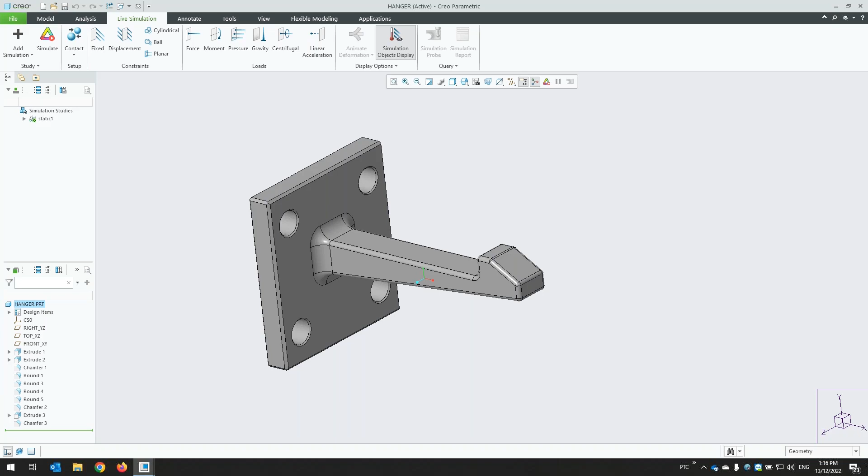Look, this is a really simple model, but I think it's good enough to explain what Creo Simulation Live is. So if we're familiar with Creo, there is a tab there called Live Simulation, and this is directly embedded into Creo. I'm going to do a really simple analysis on this model. This model hasn't been set up, no tricks here. So I'm going to set it up from scratch, and you see how quick and easy that can be.

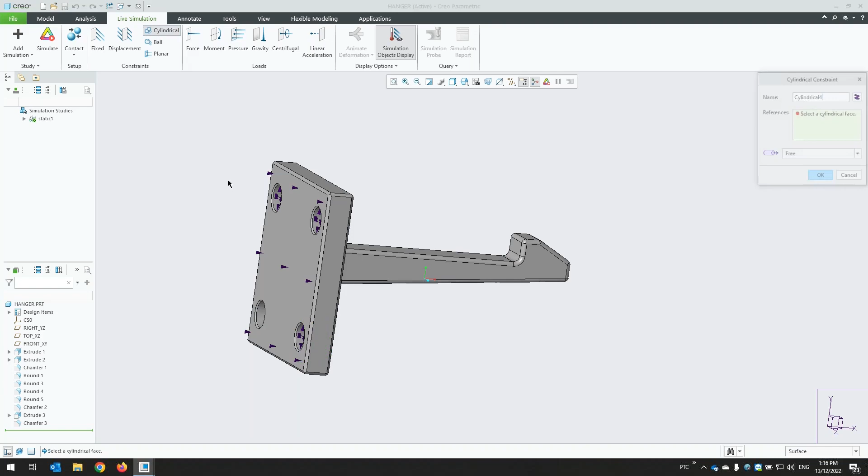So we'll create a planar constraint here, and we'll create cylindrical to represent all of the bolts that might be there. Okay, and you can see I just got to click a few times there. That's basically the constraint setup. The material's got material properties which have been assigned in Creo. So I'll put a force on here, say 50 newtons in the Y direction. As soon as I've done that, I solve.

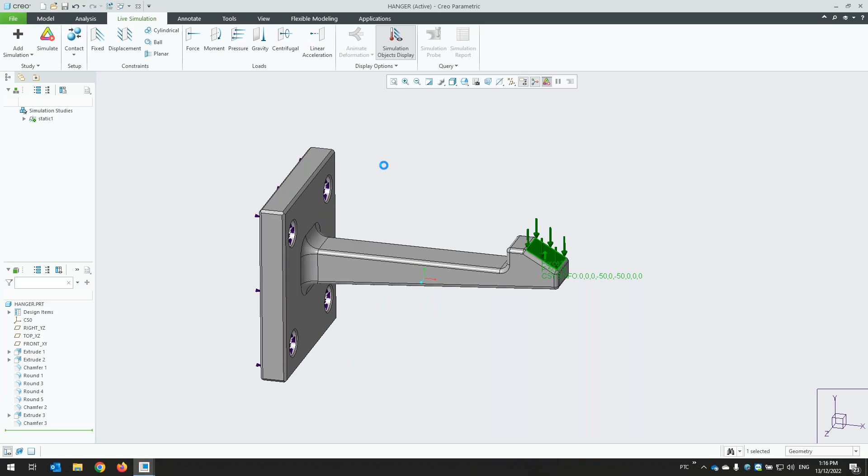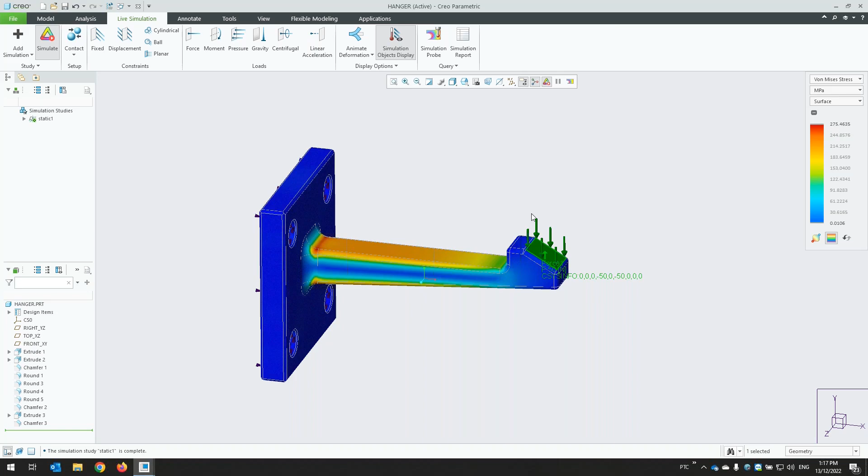You can see what's happening is it develops the solution over time. It iterates towards the solution, but it gets there fairly quickly. It is a different technology than the traditional analysis, as Alan mentioned, but you can see how quickly we get a result there. So we're looking here now at the maximum von Mises stress. Perhaps that's a little bit too high. So for our design, what can we change? Maybe we can change the width of this to 3.5 instead of 3.

Now, you notice I've had the simulation visible there and running, but then I've gone away and made a change. So the system automatically starts to recalculate. We had 270 before, now we've got 240. If that's still not enough, we can change again. So now it needs to be 4.5 or something. And it's really great for giving us that understanding about what's happening with the model.

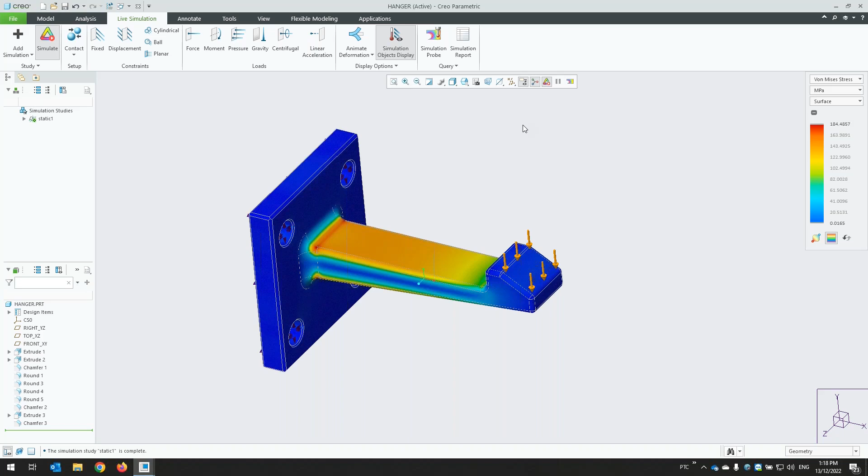If you think about this model, the way it's loaded and constrained, intuitively, if that gets wider, the stress should go down. But in other scenarios, we might not know. The intention is that it's meant to be a design level tool, for anyone and everyone. And sometimes we might not understand what influence a change might have. So you can see here we've done that change.

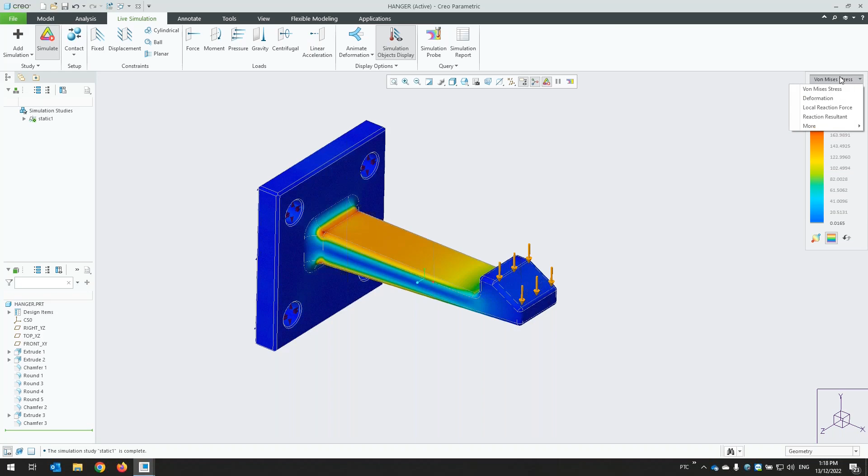So we're looking here at the stress, but we can also look at many other things. So deformation: how far does that deform? There's the ability for us to animate that, and this is exaggerated, of course, but you can see we get a potential deformed shape that shows the culmination and summation of all of our loads coming in. And although I've kept this quite simple, I've just done a couple of constraints, there are a whole bunch of other types of loads that we can apply. You can see here as well some other options.

Now this is, as Alan said, based purely on the GPU. If we go here as well, we have a fidelity setting, which allows us to control how accurate these results are. At the moment, this is set to optimal speed versus accuracy for the demo, and this is the default setting. But if we want to go to higher accuracy, we can. It just means the time it takes to solve increases. So I won't do that for today.

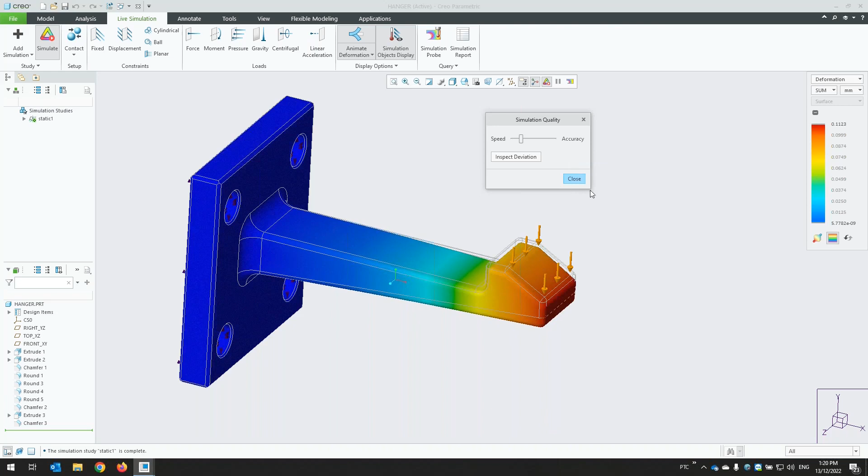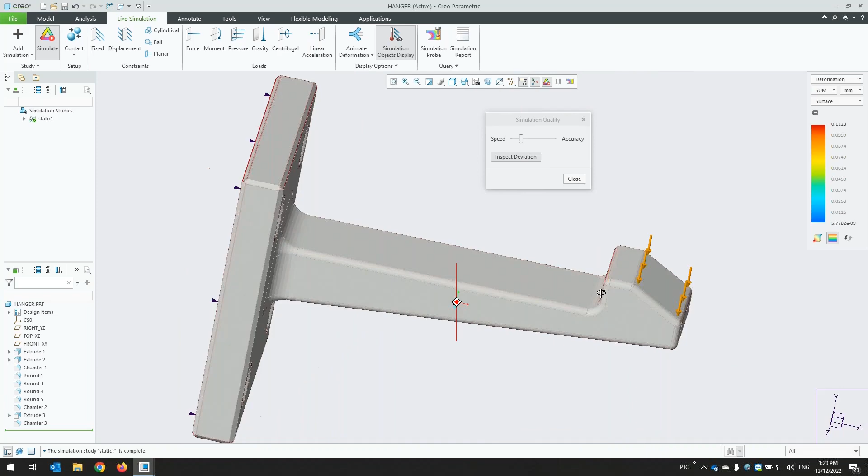The other thing we can look at, in some models it can become a bit of an issue, and this is getting into the more technical side of things, is how accurately our model is analyzed, and we can actually have a look at that. Any areas that are really red would be a problem. But just based on my experience, this model is working quite well. All right, that's pretty much it for the structural side.

Alan, I'm not sure what your plan was, if we want me to do the fluids now? Yeah, sure, go. Yeah, now it's fine. I think we've got time, so that's all good. I just didn't know if you had anything else to say before that. No, that's okay, all good.

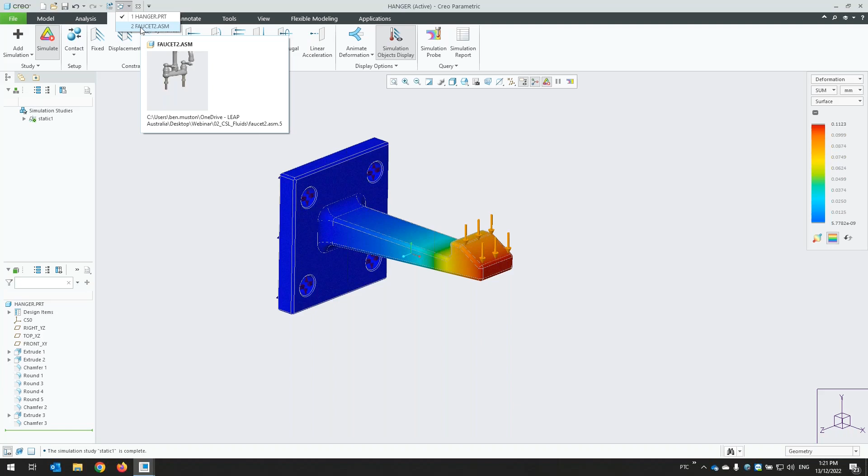All right, so moving on to another relatively simple example. We've got a tap set here, faucet, whatever you want to call it. Again, we've got the live simulation tab, but here we're working in the fluid mode. Alan pointed this out before, but we can add simulations of different types to the same model. So we've got a structural analysis, and we can have a fluid analysis as well.

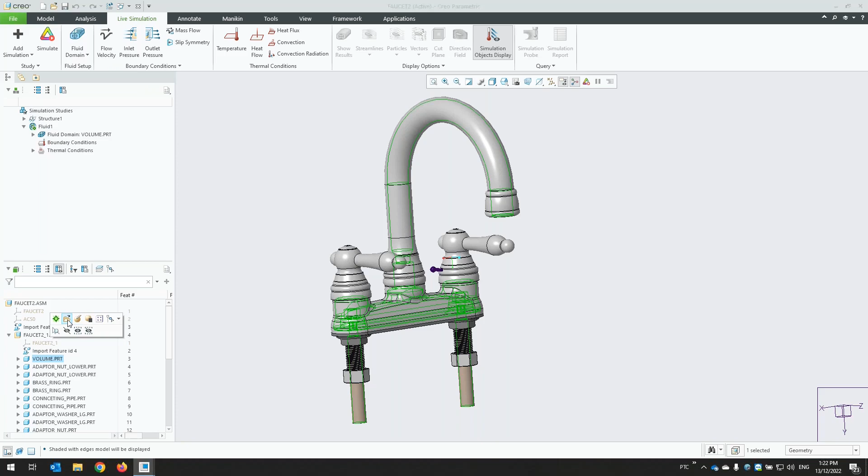When we're doing a fluid analysis, what we do need is a volume that represents where the fluid is going to flow. In this case, it's been set up, but there are tools here that help us quickly and easily define that. I'll just show you what's been set up. There is a volume part here. If I open that up, this is the internal volume of what we're analyzing, where the water would be able to flow.

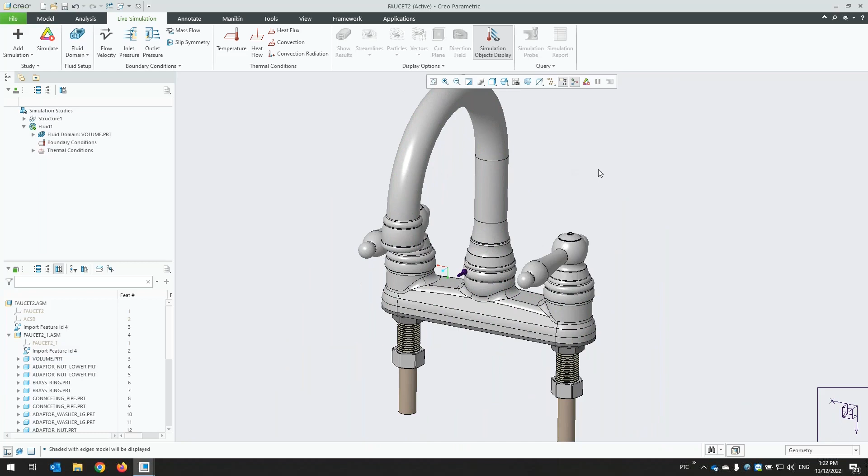Okay. Now, if we come back to here, if I was to select that part, you can see that it is sitting inside the overall solid geometry. So to set this up, again, it's pretty simple. In this case, a good option is to set a mass flow, so we know how much water is flowing through

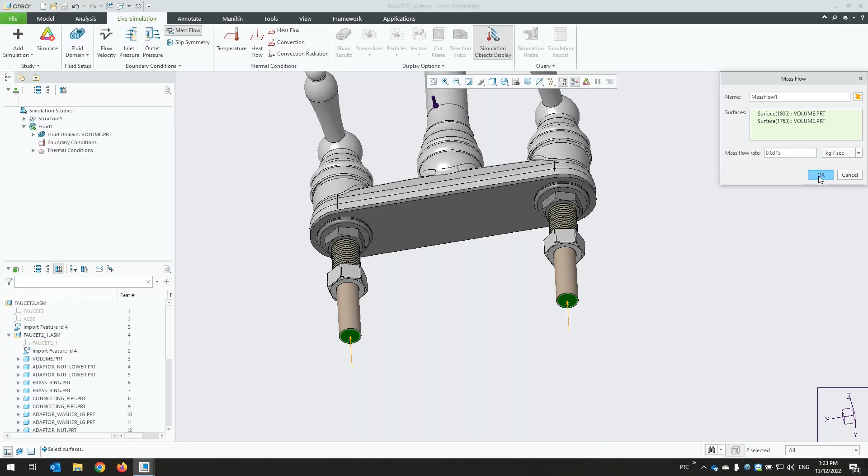through here. Now, in this case, we're assuming that we're turning both taps on to full, or to the same amount at least, at this particular rate, which we obviously would need to know and determine. If we're turning one on faster than the other, then of course we can adjust those values, but for now we're just assuming it's the same.

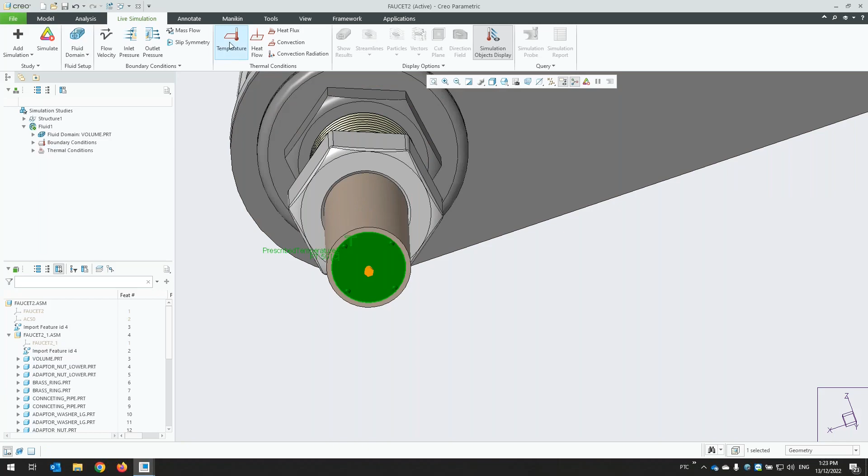Now, of course, one of them is going to be hot and one of them is going to be cold. So we can put a temperature condition on as well. So we can say a temperature of, let's say, 50 Celsius. And we can also put another temperature on here. Let's say it's winter, maybe it's 5 Celsius, okay?

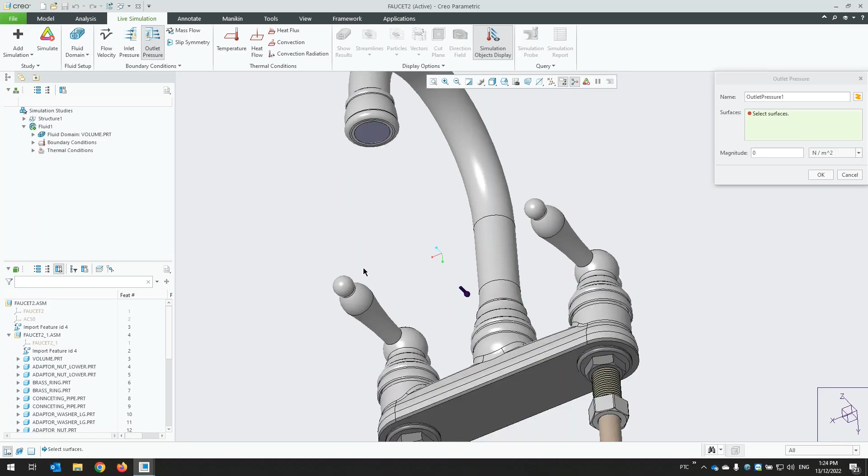So now that that's done, the only thing we really need to do is set an outlet condition, and that involves simply selecting this surface here and saying there's a pressure. Typically in CFD and this type of analysis, you set a 0 outlet pressure, so I don't even need to type a value in there. All right, that's all I need to do to set it up. Now what I need to do is just run it.

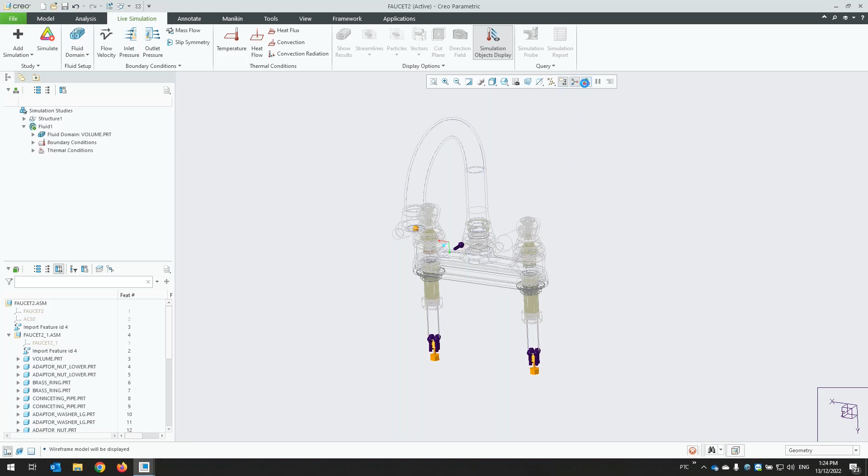And so you can see in the graphics toolbar here, and this was there before in the previous analysis, there's a little button, and you can see that at the moment this is showing velocity, but let's quickly change it to temperature. And you can see on the left we've got hot, on the right we've got cold, and how that flow is, as the solve is going, how it's working.

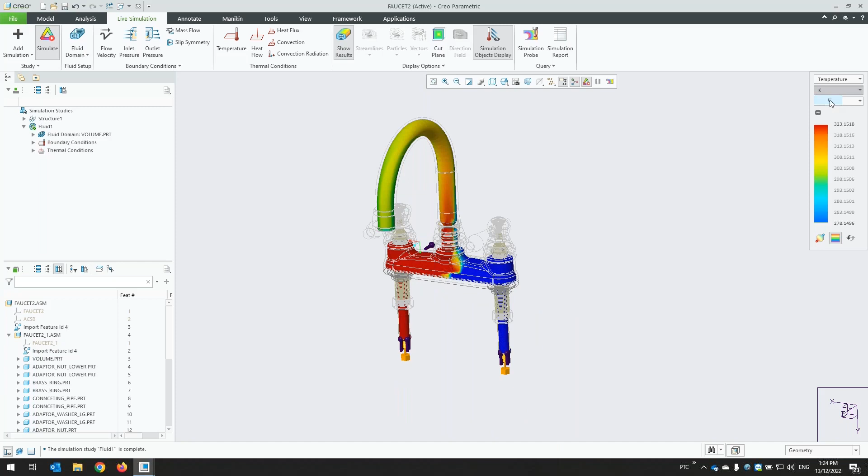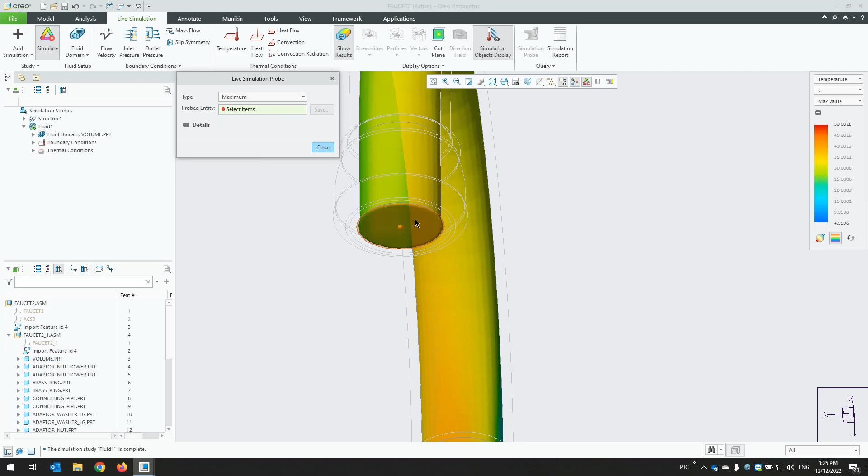Now, CFD is not necessarily as simple as a steady state solution because things are obviously flowing, but you can see there that we get, and if we change that to Celsius, you can see the maximum is 50.0018. That's potentially an accuracy setting that we talked about before, but it's a very minor differential. We can also do a simulation probe, so we can measure what's happening at a point here, or we could say what's the maximum for that surface, okay?

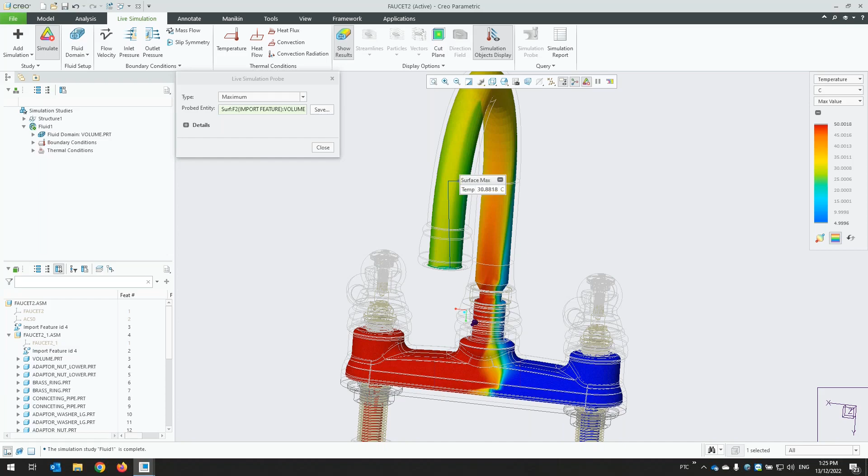And of course, this actually is still solving and might take some time, but 30 degrees based on the geometry and all the properties of the fluids themselves. We put a 50 degree, we put a 5 degree. If you've done chemistry or anything like that, you know it should be, on the average, half of the value. So it should be like that, but this is predicting a value.

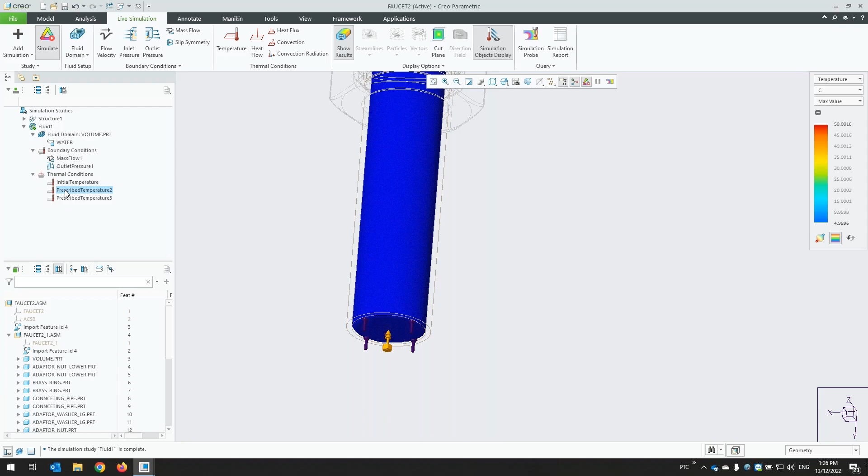Now, of course, again, we could start to change some things. Maybe we're not changing our design in this case, but maybe we're changing a value. If we look at here and we say this prescribed temperature, if we were to say, okay, now that's 75 degrees. And so again, it starts to recalculate, as you can see, and we're getting a different outlet temperature. Okay, so that's increased significantly.

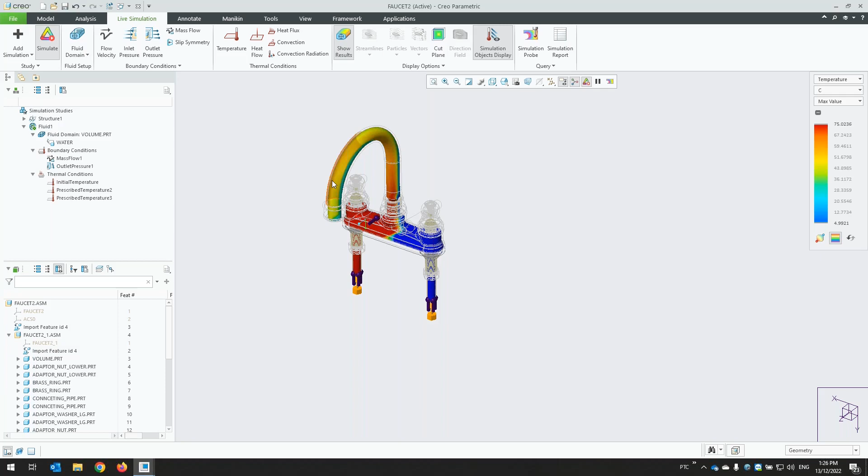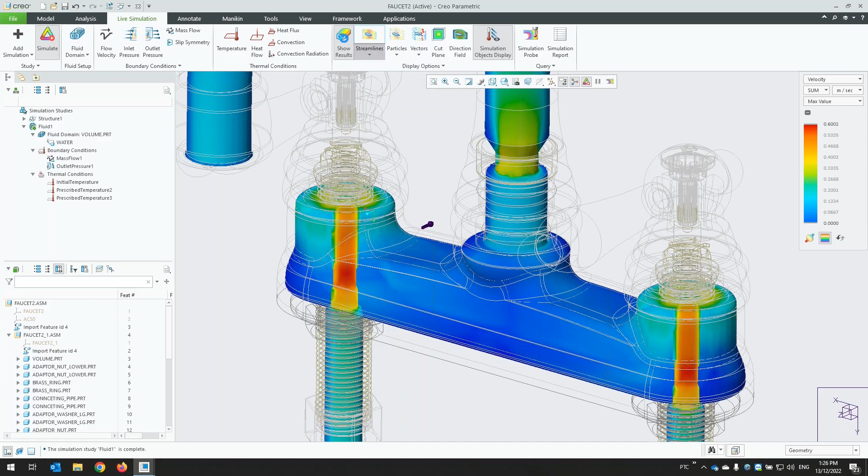There are a few different ways we can start to look at these results. If I change it back to velocity, you can see where the flow is the fastest. So depending on what you're looking at, cavitation, things like that, you can see, okay, that's where over time problems might occur. You can start to look at things like streamlines, where the water's flowing. You can choose particles, and see how that's flowing.

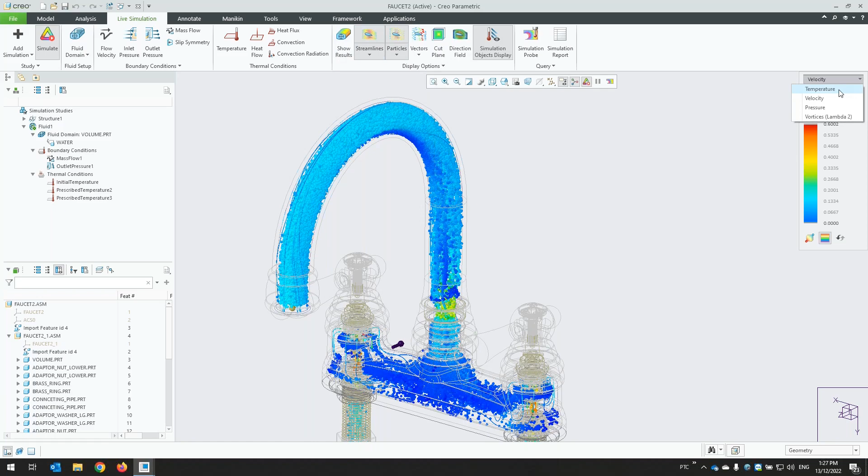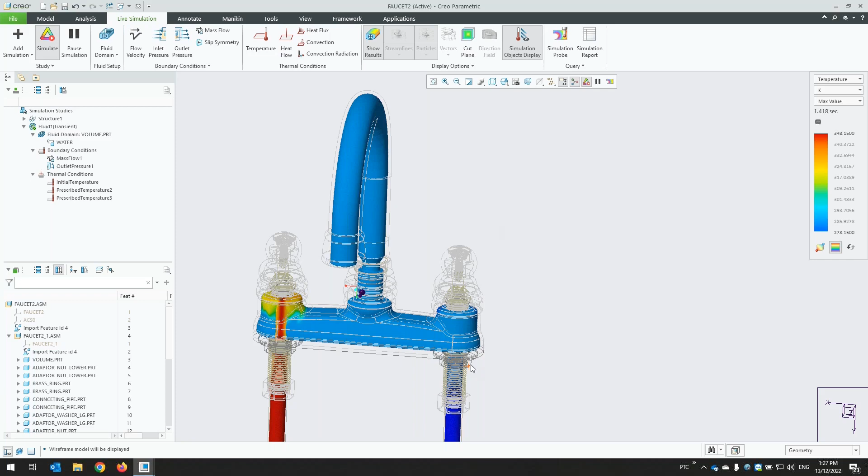If I change back to temperature, there is also an option under here for transient mode. This is assuming starting conditions of the temperatures that we've put in. And this is looking at, okay, now we're turning it on, and you can see how it's counting up after each second. So you can see how the hot water is flowing in. The cold water is not changing things too much over here yet. And it's actually heating up all the water inside. And this is only after a couple of seconds.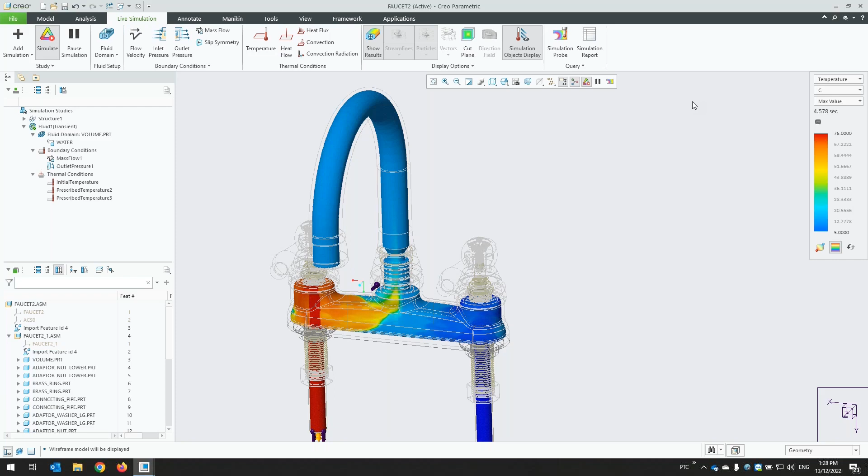All right, if we set that to Celsius, that might make more sense. So you can start to see it's taken 4 or 5 seconds. And if we were to put a probe for the maximum value on that surface, we can then start to graph this and see what happens to the maximum temperature over time.

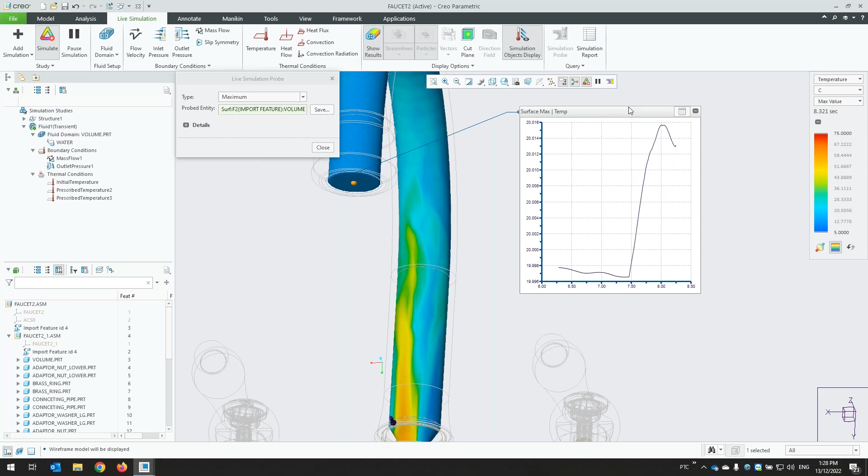Hopefully this example does make sense to you guys, and you can start to see that it's going to take some time based on that particular flow rate. Now, maybe the flow rate needs to be adjusted, and that time would come down. But certainly what you see on screen there is, I guess, approximating reality.

Yeah, so it's showing me why it takes so long for the hot water to come out of my taps when I turn them on. You need to get a better hot water service. That's right. We'll get it in the roof.

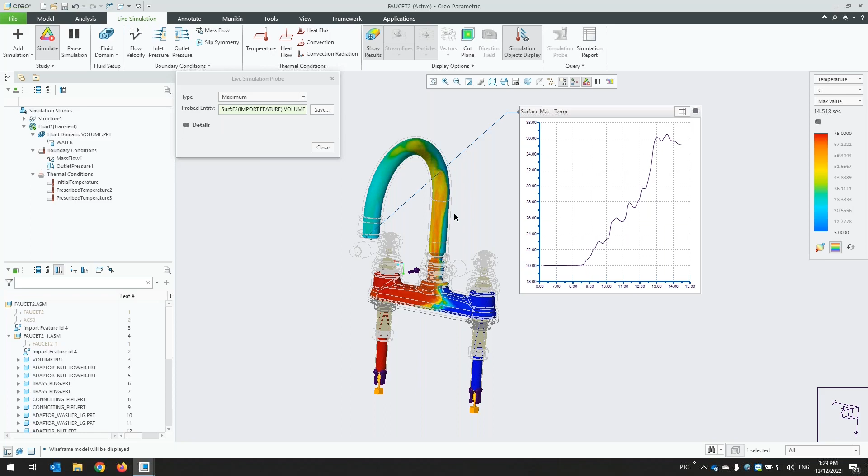Anyway, as you can see, it's very, very quick and easy to set it up and then to start to investigate what's happening.